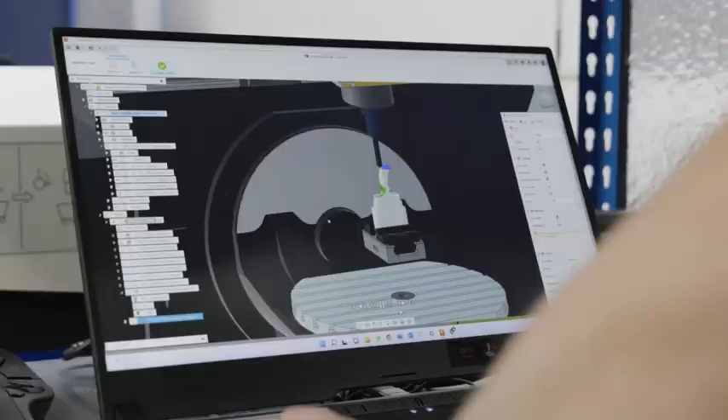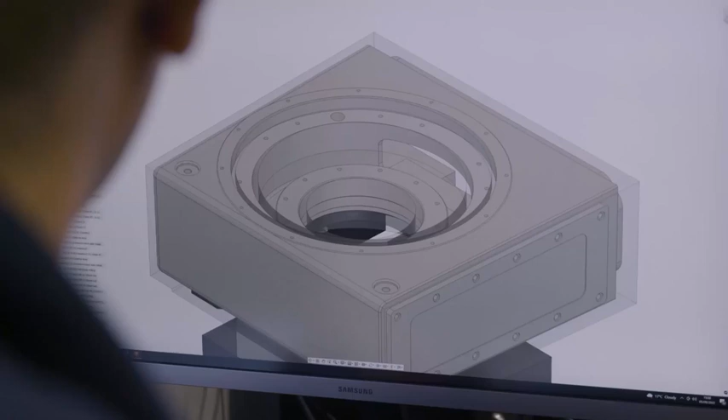We all know that the CAM software market is full of market-leading providers, and when I set up my company, I wanted to use the best software out there. I've tried many different softwares, but time and time again, Fusion 360 comes on top. And it's not only because we do simple parts, and it's not only because we are hobbyists. We're obviously not hobbyists, we're not doing simple parts, we're doing very demanding parts. And with Fusion 360, we can make them much quicker than anyone who is not using Fusion 360.

Our business started in 2018, and our vision at Nero Precision Engineering is to always use the best technology, the best tools, the best software, the best machine tools to produce the best possible parts we can for our customers. As we are certified in ISO 9001, and we're working towards aerospace accreditation as well, we work with different sectors, starting with aerospace, defense, medical, metrology, through even small ones like general engineering.

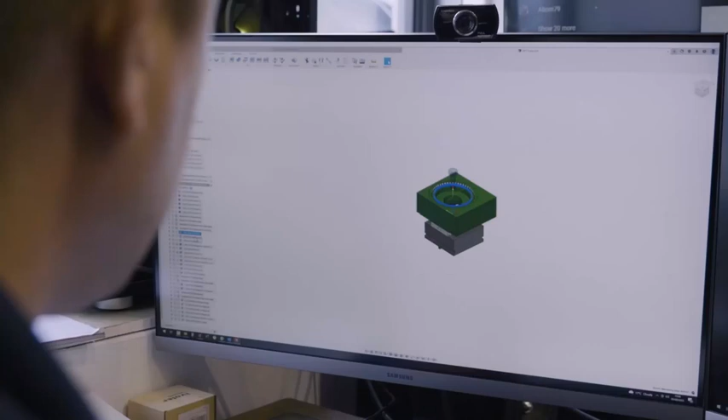I was looking at the market for different options, and it's always a game of how much do you pay and how much do you get back from it. With Fusion 360, we not only have great capabilities, but also it's easy to spread that software around the company. It's like the apps on your phone - you don't get trained to use your apps on your phone, they're just user-friendly. Fusion 360 is user-friendly. It's made to make parts.

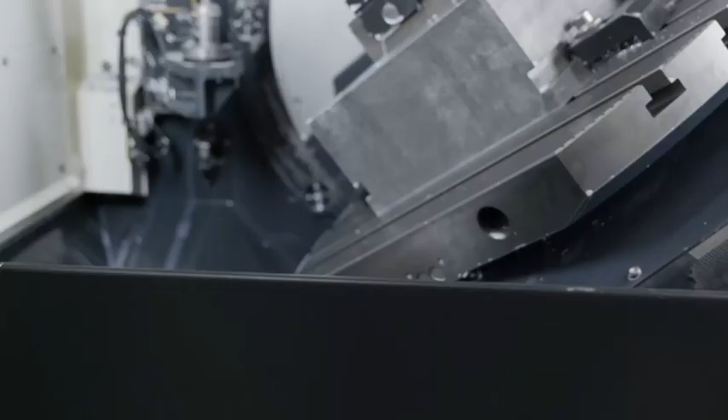With other software, it took us over a month to start making money. With Fusion 360, we are making money within week one of having the software, and we are 100% efficient at the end of week one.

You have a couple different sources of support. A really big one that made a good impression on me was the support from Autodesk. We have the Autodesk library, Autodesk forums, and the users of Fusion 360 are always helpful. Then you also have YouTube, which is absolutely great because you have users doing different approaches to the software, different views on the software. They machine parts in a different way. So you're learning the software, but you're also learning machining techniques.

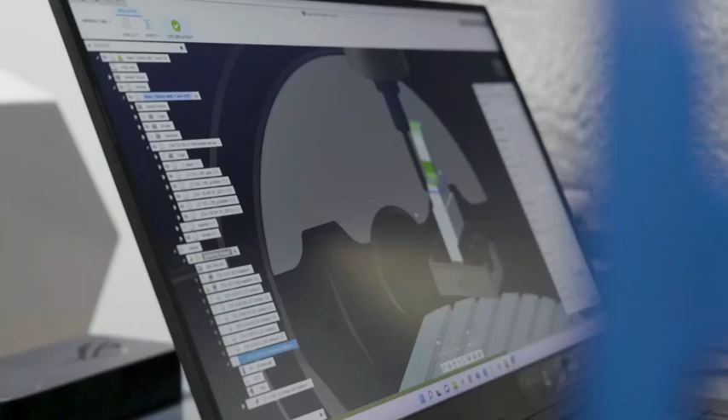As a new startup, we have to compete with the bigger, more established players, right? So we have to not only show our skills and craftsmanship, but we have to have a tool that allows us to be better, to be quicker. With Fusion 360, we can deliver parts quicker simply because we can program them quicker. When the RFQ comes in, we can program it and make the spindle turning quicker than everyone else in the market.

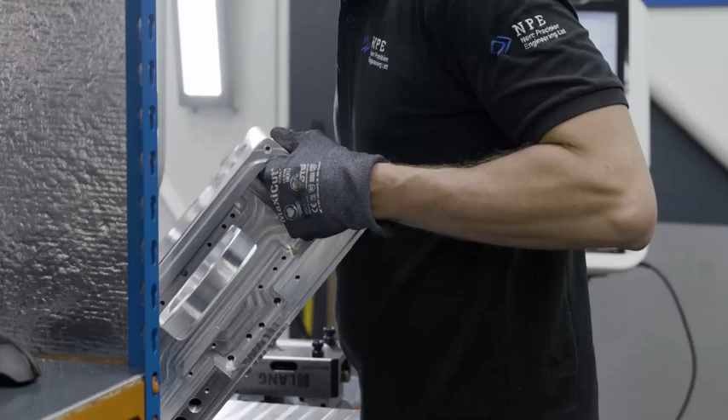And we try to utilize the overnight runs, which means when we have a 3-axis machine, we put 10 vices on, we have 10 different one-offs. And with Fusion, to program 10 different one-offs is as easy as programming one-off and running it overnight. So we're making money, we're better than our competitors.

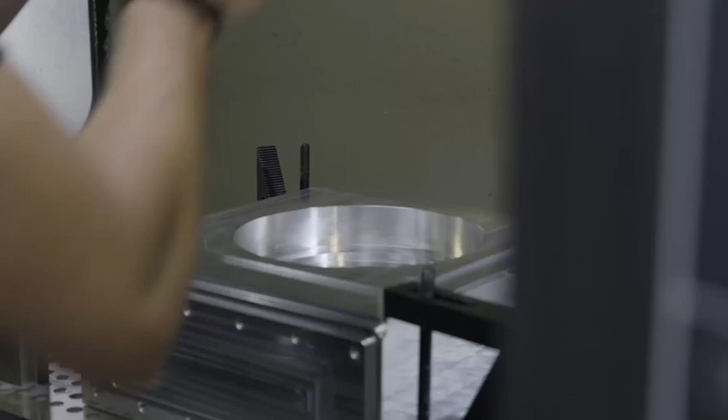When we started using Fusion, it was a 3-axis package, and we only had a 3-axis machine, so that's all we needed. But then the business grew and we invested in a 5-axis machine, so naturally we invested in Fusion 360 machining extensions. Back then I was thinking that machining extensions are only for 5-axis machining, and oh boy, I was wrong.

We use extensions for 5-axis machining, we use extensions for 3-axis machining, for automating parts, for making our production runs much more efficient. So when you're running 1,000 off, or hundreds off, or 10,000s off, you're fighting for every second.

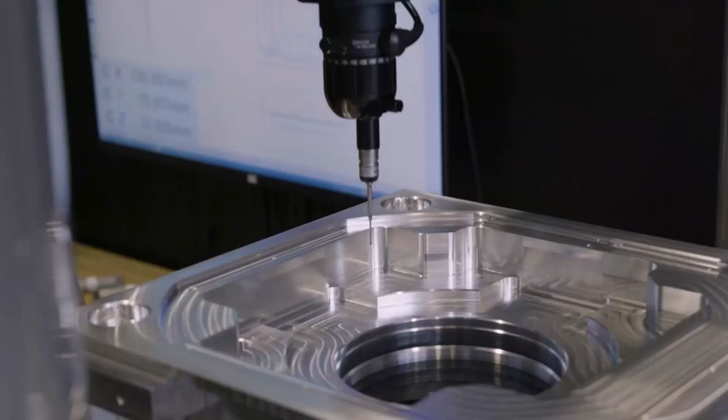For any startup company out there, or for anyone looking for better software to produce high complex parts - there is software out there that's more expensive, but for general machining, high complex parts, quick turnarounds, being quick and responsive to customer needs, just like me, you will find Fusion 360 is not a hobby software. Fusion 360 helped us increase our turnover by 400% in the last 12 months.

Autodesk is listening to customers, and they do implement that. Every few months, the software gets more and more capable. It's not only the best as it is now - every few months, you're certain it will be better.